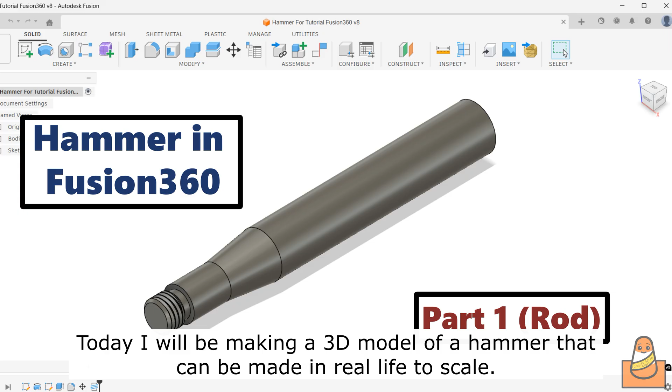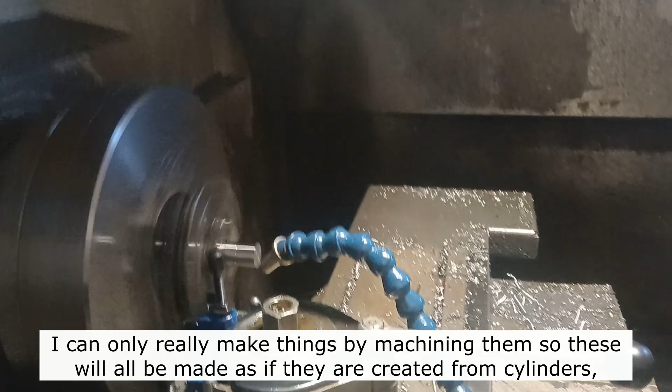Today, I will be making a 3D model of a hammer that could be made in real life, to scale. It will be split into two parts, the body and the head, that can then be attached by a thread on each side. I can only really make things by machining them, so these will all be made as if they are created from cylinders, and then having holes drilled into them if needed.

In this video though, I will only be making the rod section. The skills we will practice today by making this is the ability to create 3D models with the revolve function, bevels in a 2D sketch that will be revolved, and applying threads to straight cylinders.

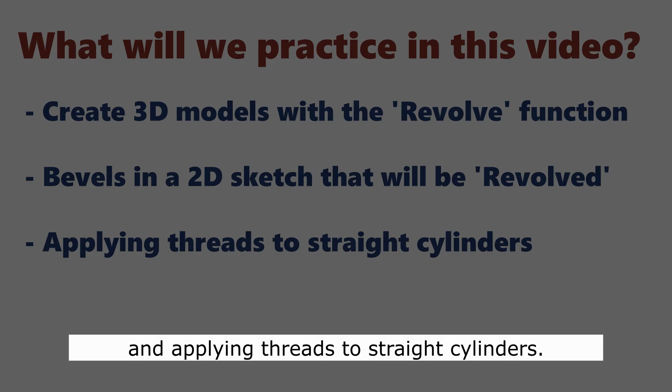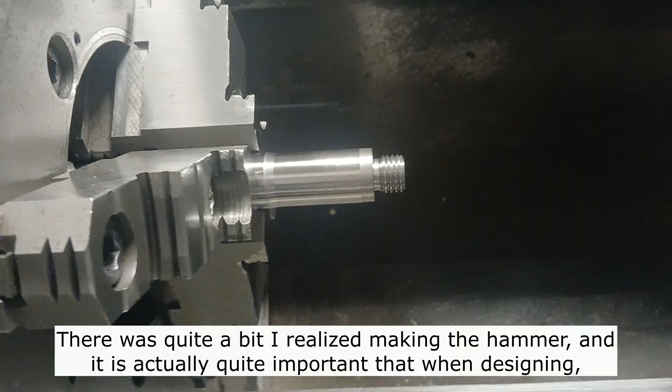I actually made this before I finished making the video because I wanted this design to be workable. There was quite a bit I realized making this hammer, and it is actually quite important that when designing, you think about the person actually making the part.

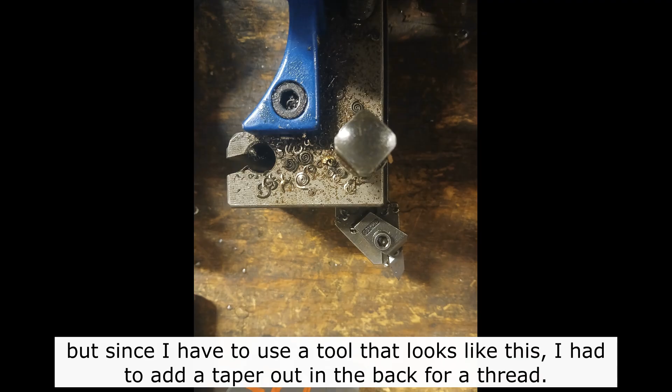If you were 3D printing my first design, it could be fine. But since I have to use a tool that looks like this, I had to add a taper out in the back for a thread. Well, whatever, let's actually make this model.

I'll walk through step by step in live time how I would actually make this using the drawing here. Take a screenshot if you need to, because I will be using these dimensions for the sketch.

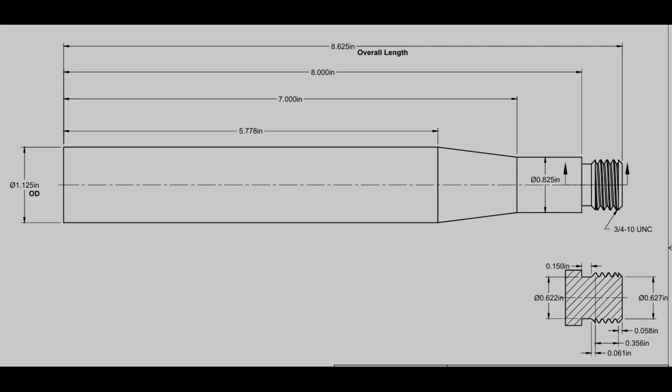So Fusion360 recently changed this, I see. I'm going to choose part design, inches and ounce mass. I'm going to do create new. And then I'm going to create a sketch.

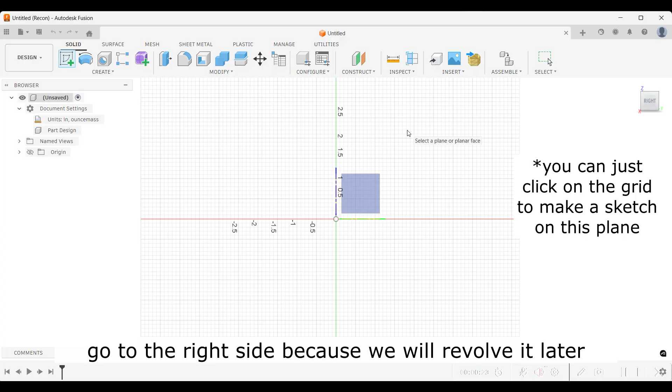Go to the right side because we're going to revolve it later. And let's start with a line. If you look at this drawing, it looks kind of crazy, but it's actually not that hard.

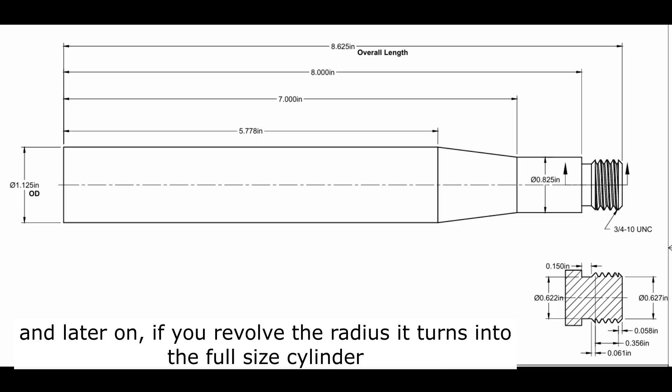So you just take the outer diameter, which is the biggest cylinder, and you're going to divide it by 2 to get the radius. And later on, if you revolve the radius, it turns into the full-size cylinder. So actually, I'm going to get my calculator.

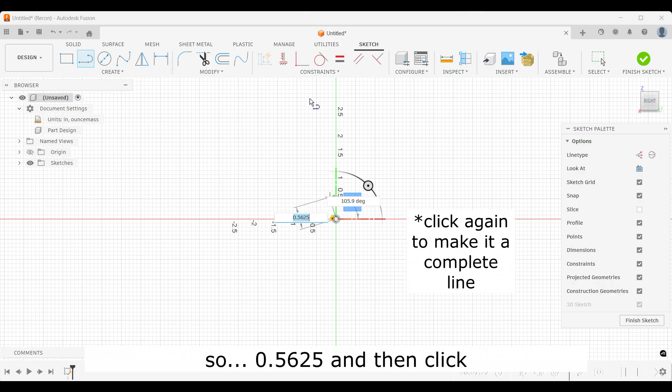And then we're going to go up 0.5625. And then click. I'm going to zoom in a bit. And then the total length will be 8.625, as you can see on the drawing. That does not need to be divided by 2 because it is not a diameter.

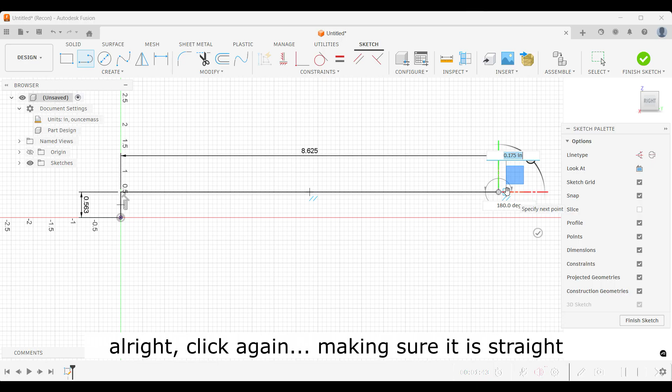All right, and then click again making sure it's straight. And then I would go down that much, and I would press that.

Now for the second part, as we can see, there is a feature at the front. Now let's break it down into simple steps.

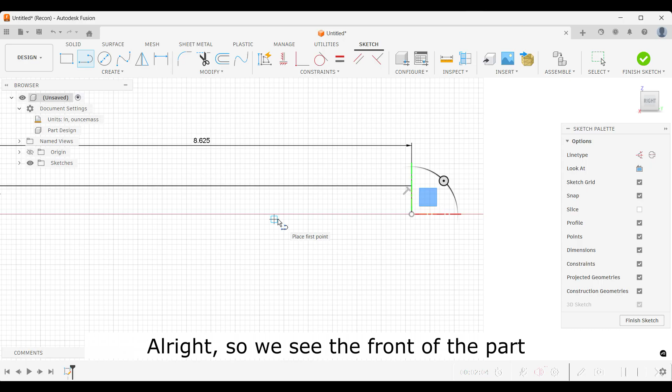All right, so we see the front of the part in the thread detail at the bottom has a diameter of 0.627. So let's take that and turn it into a radius so we can make the front part.

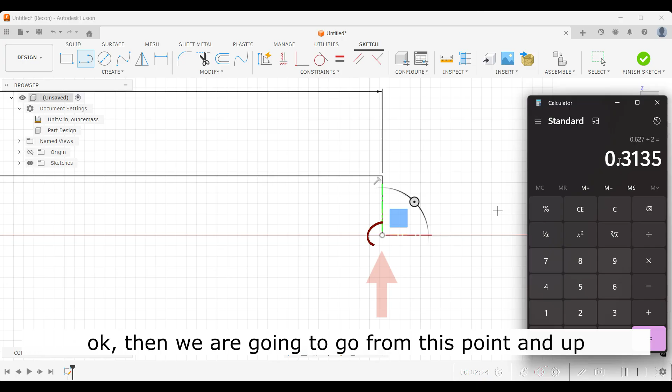0.627 divided by 2. Okay, then we're going to go from this point up to 0.3135. There you go. So that is the start of that.

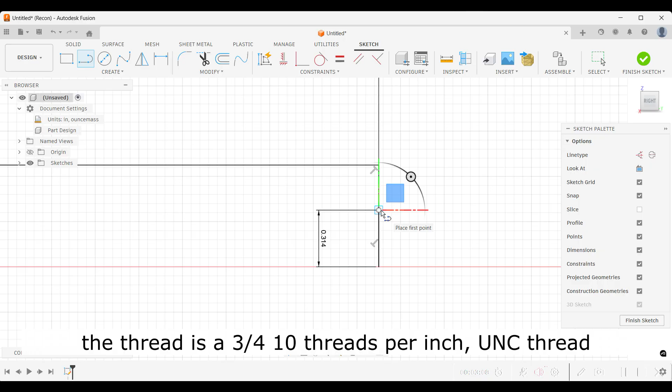You can't really see this, but this thread is a 3/4 10 threads per inch UNC thread. So we would take 3/4, and since that's the diameter of the thread, we're going to divide that by 2 to get the radius, and we're going to go up 0.375.

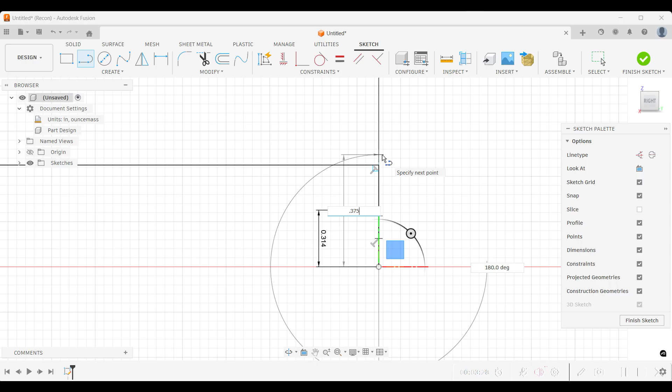And oh, I messed that up. 0.375, click, and that doesn't really look right, but the thing is, we have to make it to the length of the actual thread, and then it will all come together.

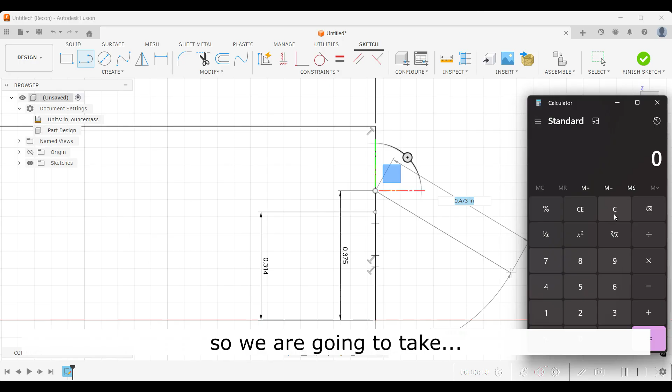So we're going to take the first length, 0.058 plus 0.356 plus 0.061. And that is the length of the thread cylinder.

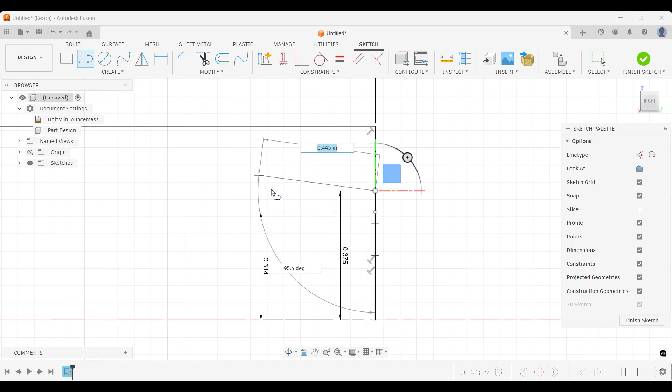0.475. Make sure it's straight, then click again. And I would personally go down here and maybe complete it like this, so you can see that you made a completed shape here.

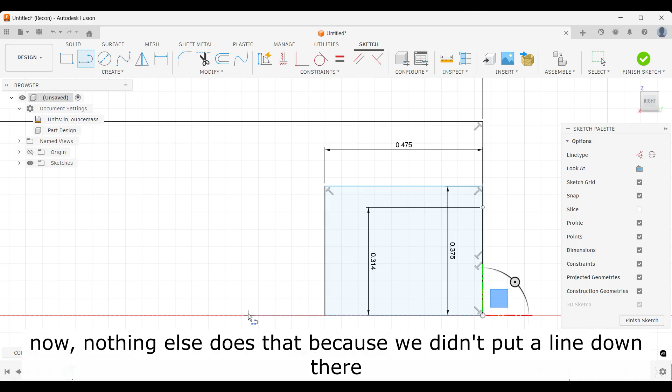Now nothing else does that because we didn't put a line down here. And that's fine because I don't really need that right now.

If we look at the back part of the thread, it is actually a different size than the front. So we're going to take that size. It is 0.622 in diameter. We're going to divide by 2, 0.311, and it's at the back.

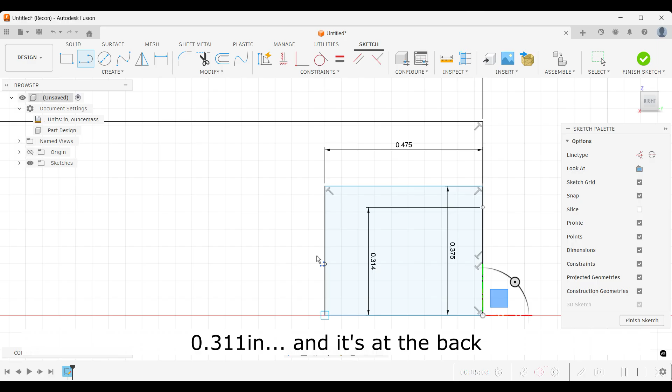And here we go. We made it. And it has a length there, so it's 0.15. Perfect. I'm going to complete that too so it looks like a finished shape.

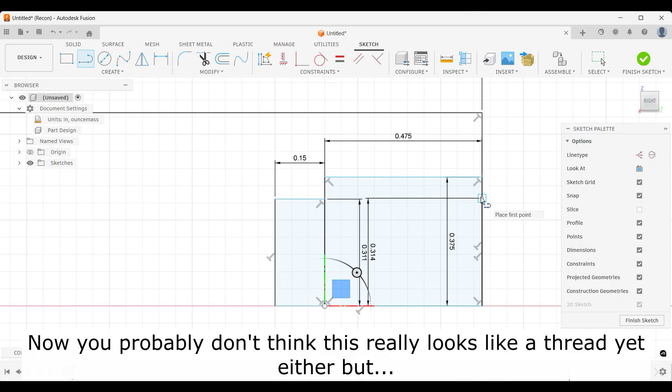Now, you probably don't really think this looks like the thread yet either, but we will add the bevels and that should help quite a bit. So you start here at the point where we first made that outside, that beginning of the bevel size.

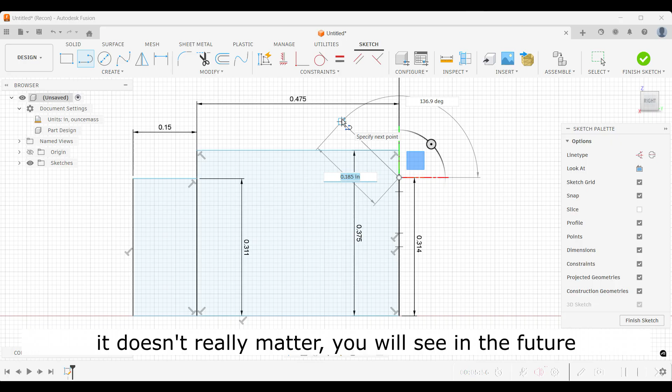So we're going to click here, and then we're going to go somewhere off into the distance. It doesn't really matter, you will see in the future. And then do it on the other side too.

Then you have sketch dimension, and I don't think I've shown this yet, but here we are. We're going to start with the straight edge on the side. This is going to be where the angle comes from.

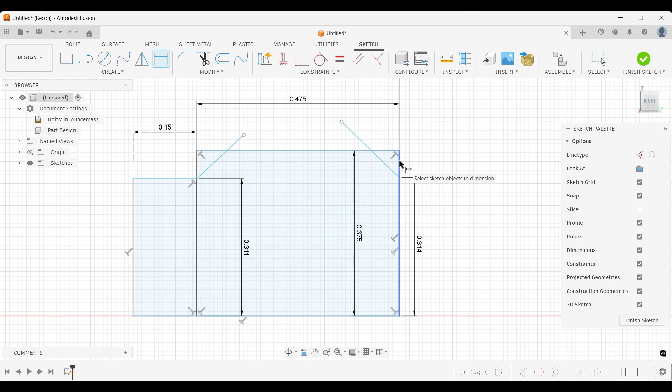It's very important that you choose the right edge. In the future, you may see an example of why. And then you click the other edge, and this is the angle between those two lines. I was pretty close, so it didn't really do much, but let's see the other side.

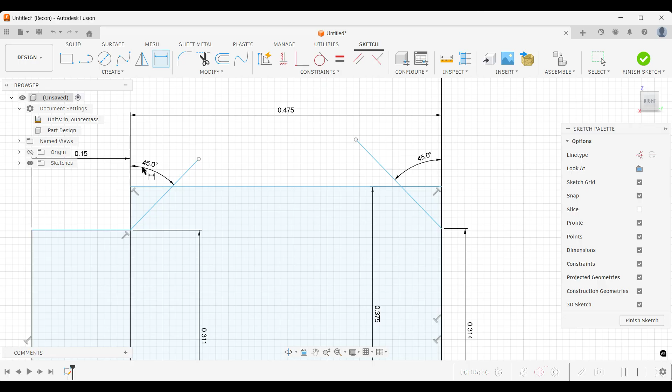There we go. And if the extra length bothers you, you can trim it like that. You can also trim this, but it gives you a warning. As long as you put in the right size to begin with, it's fine.

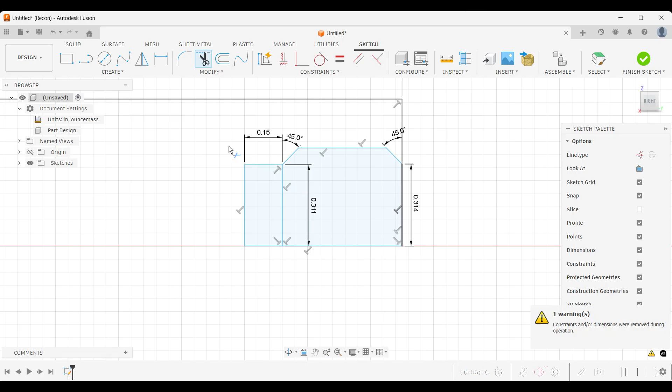Yeah, so that kind of looks like it's starting to look like the thread now. But we still aren't done, so let's start with the rest of the tapers. There's only one, so it's not that bad.

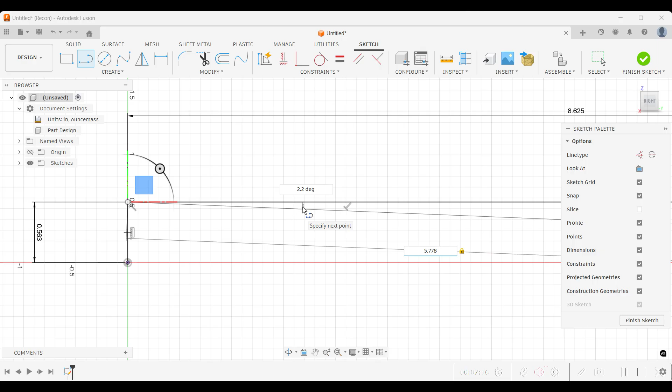All right, the first length is 5.778. I'm going to move, make sure it's straight, and it creates a point there. It shows up, so it's useful.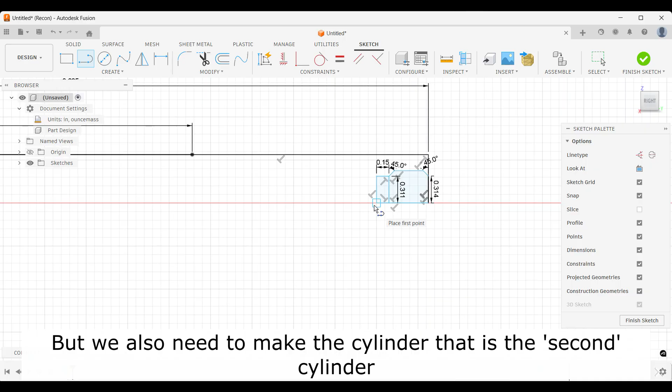And then the second point will be at 7 inches. But we also need to make the cylinder that's the second cylinder. Let's make that. It looks like I forgot to do that.

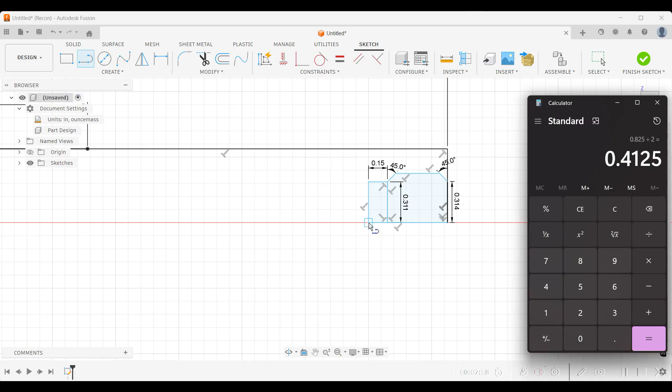0.825. Let's put in radius, 0.4125. And then we just go up at the back of that thread, and perfect. We will remember that point for later.

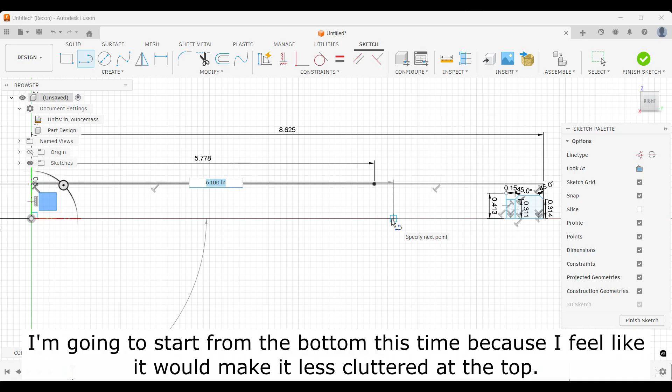Okay, and let's go. I'm going to start from the bottom this time because I feel like it would make it less cluttered at the top. But it doesn't really matter.

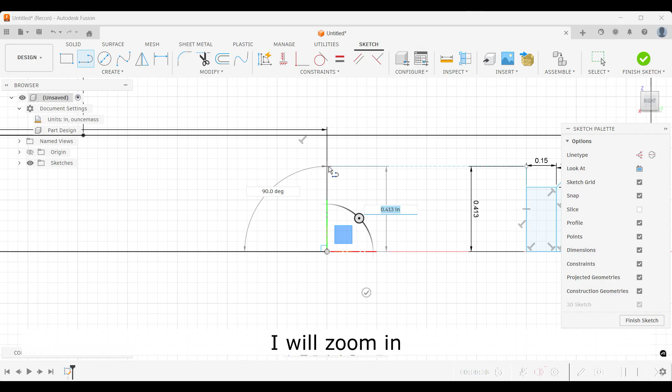And then we have to make it match up here. So I'm hovering over the point, and if you just drag straight, it has a dotted line, and that means it's aligned with each other. So I'm going to zoom in, and ta-da.

Do not be worried by this blue stuff. It just means that you have a completed thing here. If I took away this line, it would go away, but I don't really want to do that.

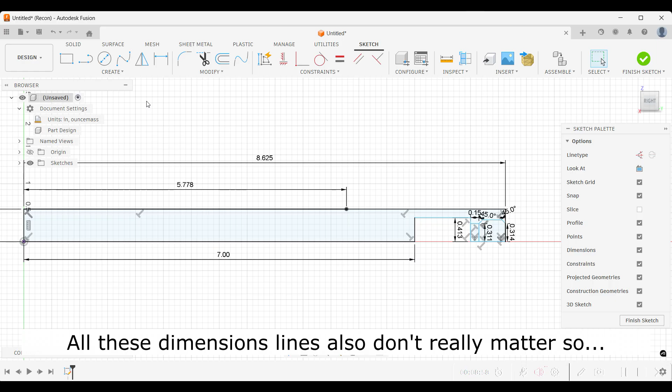All these dimension lines also don't really matter, so do not worry about those if you don't know what they are. They just make sure you have the correct size.

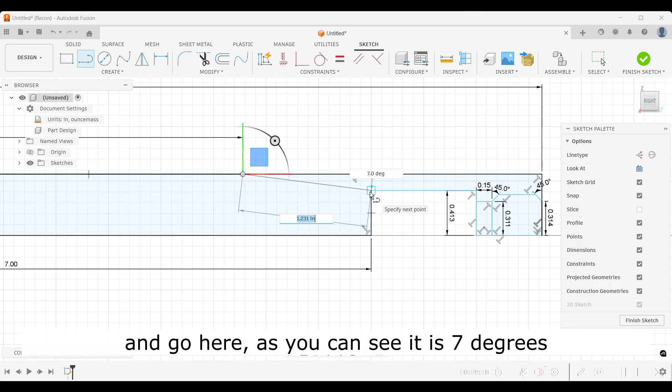And then here, from that end point of 5.778, click here and go here. As you can see, it's 7 degrees exactly. So that is how you know you did it right.

And click to that point you made, and you can close it up here and finish sketch. That looks about right to me.

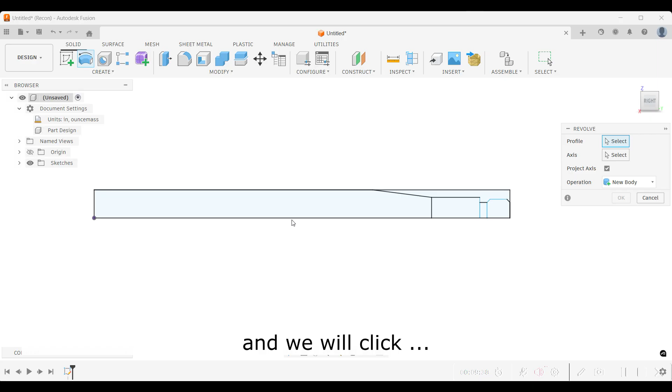So then we go to the revolve, and we will click the bottom edge. No, actually we have to select the profile first. 1, 2, 3, 4. And as you can see, that's kind of what it looks like in the drawing.

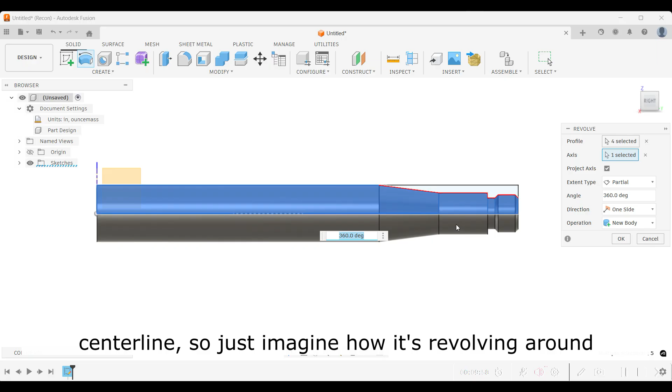And then click axis. Here's that center line. So just imagine how it's revolving around. And then, okay. Now we have the base part of it.

We can add on some bevels now, or chamfers. I'm going to start with that, and then after that we're going to make some threads.

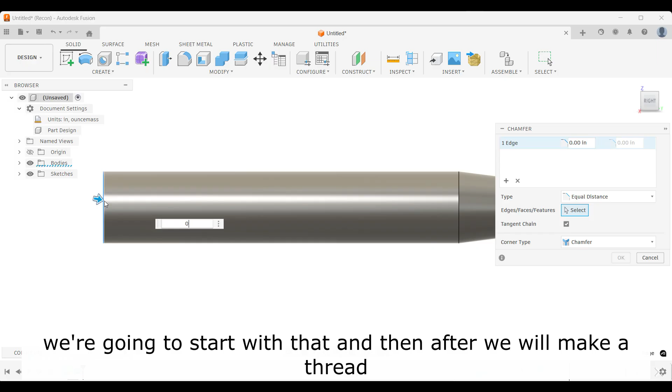Okay, I'm putting 0.025 chamfer on the sharp edges, like here and here. Okay, this part does not need a chamfer because it has no sharp edges.

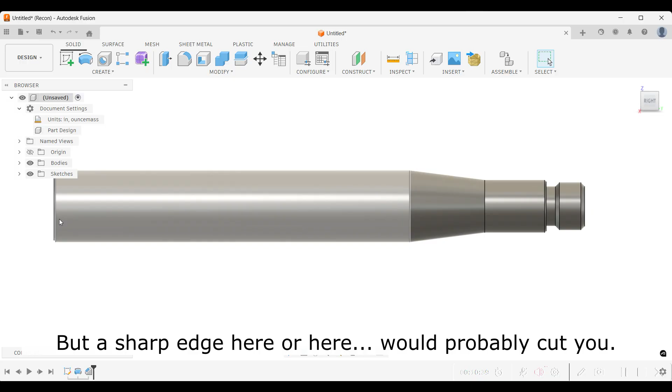Like if you ran your hand over that, it would not cut you. But a sharp edge here or here would probably cut you. And these already have chamfers built in, so you don't need to do anything there either.

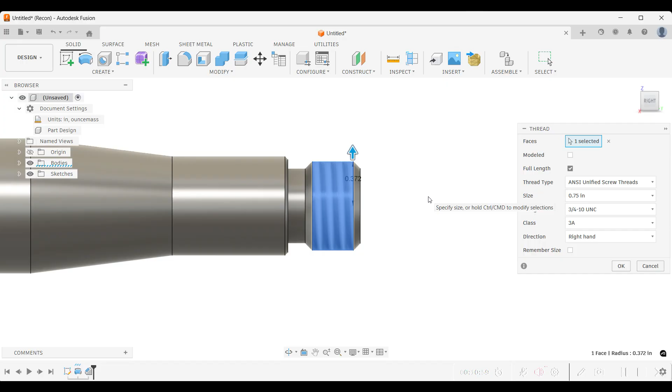So we're going to go to create to make the thread, and we're going to look for the thread option. And here we go. We're going to click on this face. As you can see, it already knows what kind of thread I want to make.

I always choose the modeled option so I can see it. Just make sure it's 3/4, 10 threads per inch UNC. Right hand, looks good to me.

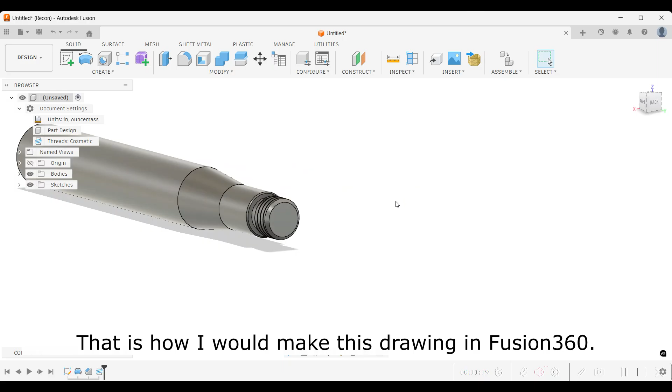And there we go. That is how I would make this drawing in Fusion 360.

So the main takeaway is when you look at these drawings and you're trying to make a part using the revolve function, make sure you take all the diameters, usually they are marked with a diameter symbol, and divide them by 2. That way when they revolve around, they create the full circle.

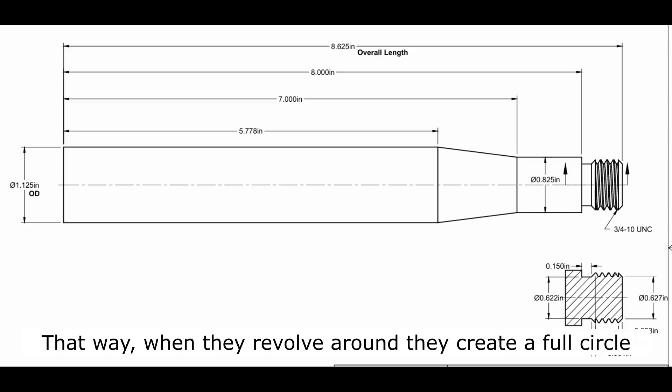And that's how you make the rod. Sooner or later, I will make the hammer part, but I have not done that in real life yet because I did not get around to it.